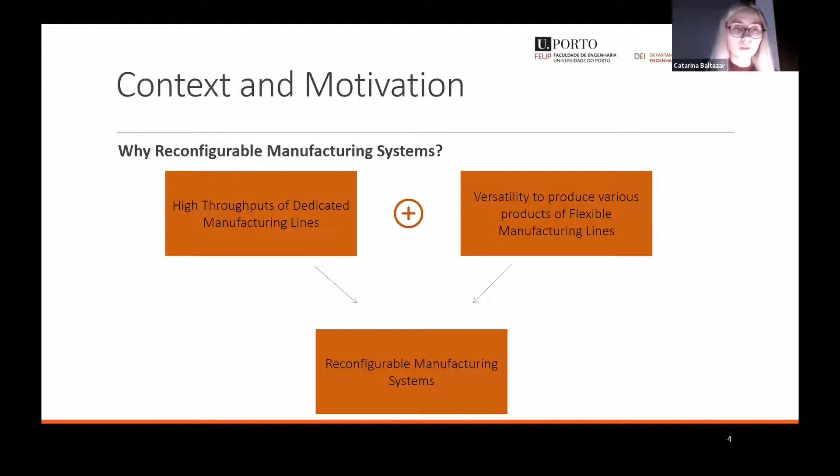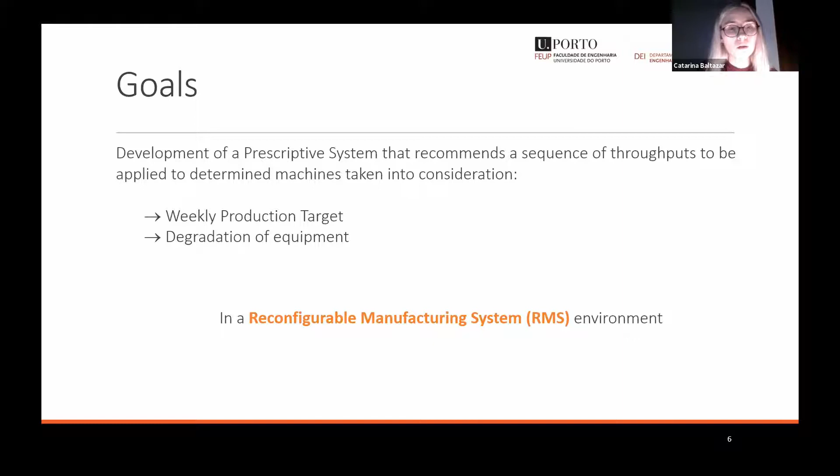So our main goal is to develop a prescriptive system that recommends sequences of throughputs that will compensate production losses due to maintenance actions, and also will take into consideration the weekly production targets and the degradation of equipment. And since we are in a reconfigurable manufacturing system, the compensation for production losses can be achieved not only by tuning the different throughputs, but also by routing pieces to healthy assets. So when we refer to degradation of equipment, we need to take into consideration that different throughputs will impact equipment differently. So if we increase the throughput, the degradation will be faster, and if we decrease, it will decrease the degradation of equipment.

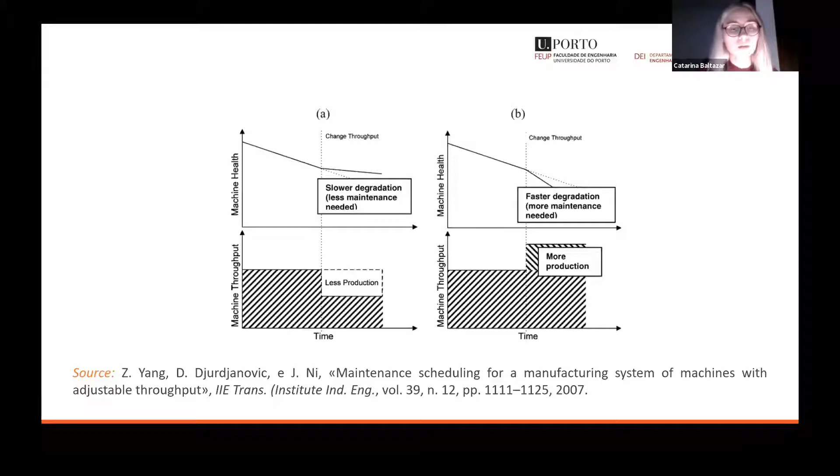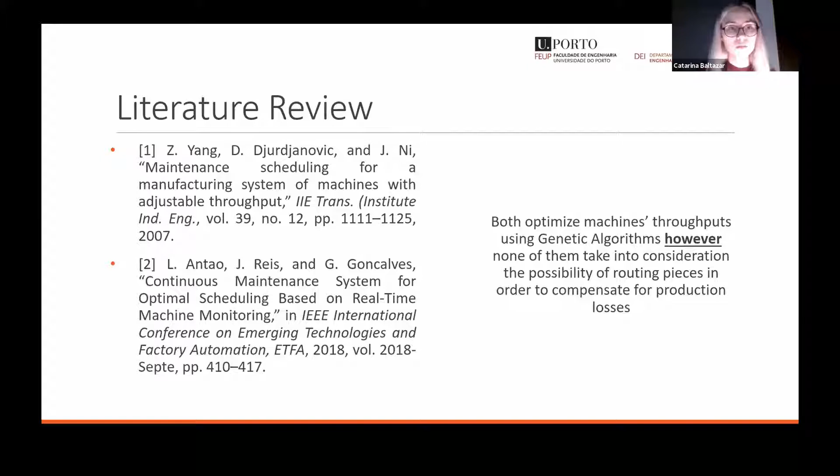So prescriptive systems can be understood as systems that recommend one or more courses of action, and there are prescriptive systems to help in the order of spare parts, scheduling, and life cycle optimization. And regarding their implementation, evolutionary and swarm algorithms are the most common ones. So before going into our implementation, regarding the papers already published, I would like to highlight two where both optimize machine throughput using genetic algorithms, which will also be our approach. However, none of them take into consideration the possibility of routing pieces in order to compensate for production losses.

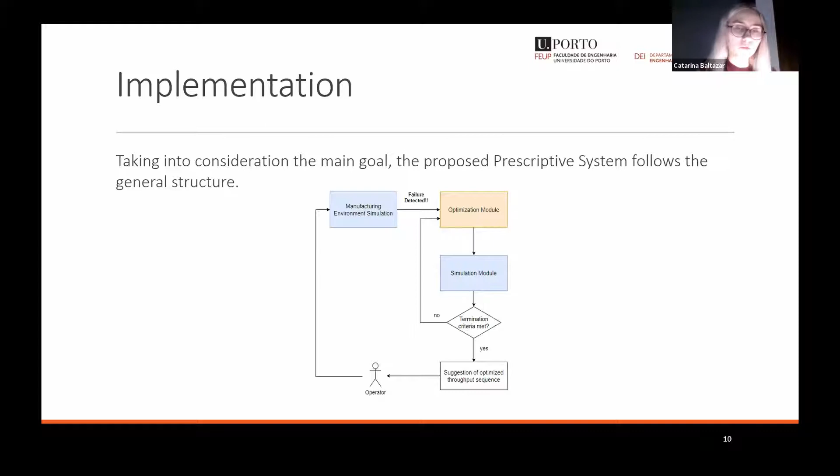So, taking into consideration our goal, we decided to implement a simulation-based optimization module. And this simulation will allow us to evaluate the solutions, what-if scenarios, and also simulate failure predictions. And our general approach is that the manufacturing system is running in the manufacturing environment simulation, and once a failure is detected, the optimization module is triggered, and the generated solutions are evaluated through the simulation module, which is an image of the first block. And the optimization loop will occur until the termination criteria is met. And when it stops, the suggestions are presented to the operator. And now that I've given an overview of the solution proposed, I will discuss each module individually by starting with the simulation one.

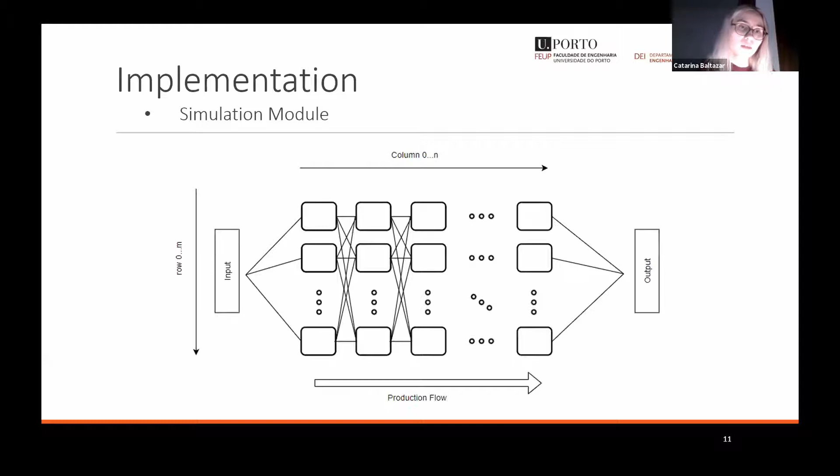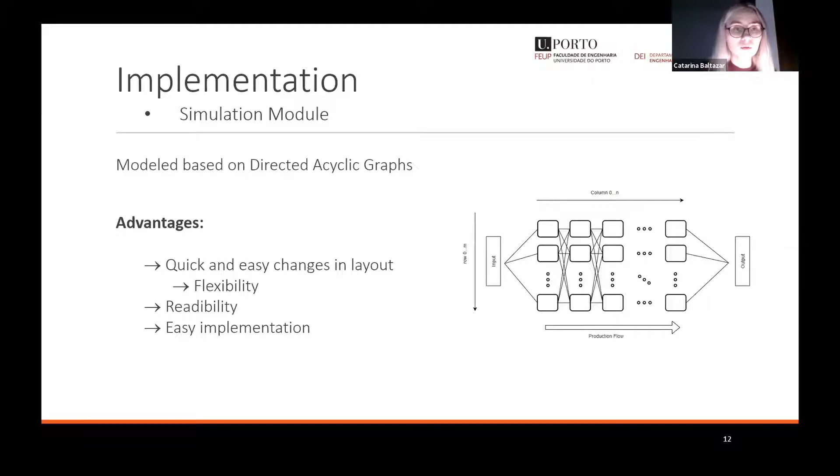In our paper, we simulated the systems as the ones in the figure, where a piece processed in any machine of the column, for example, 1 can go to any machine in the column 2. And this means that all machines in each column have the same available type of operations. And the pieces are processed sequentially. So they enter as input and get out as output. And to model these kind of systems, we used graphs as they allow quick and easy changes in layout, offer good readability, and are easy to implement.

Since we used graphs, a node corresponds to a machine and the edges are the connections between the machines, and these edges are weighted. The lesser the weight, the higher the priority, and this is how the machine knows where to send the piece. Also, each node has associated an object of the class machine, which saves several information regarding the equipment, and those informations can be divided into 3 types of parameters.

The identifying parameters such as age and machine ID, however, not limited to these 2. Operation parameters, which is the types of operations available and the current throughput, and reliability related parameters such as mean time to repair and mean time between failures.

These last type of parameters are very important because since we did not propose a predictive module, we need to somehow simulate the failures in order to validate our system.

So we consider that the probabilities of failure are known and failure detection is done based on time intervals. So the mean time between failure associated with each machine decreases each tick of the simulation, and once it falls below a certain threshold, a failure is detected.

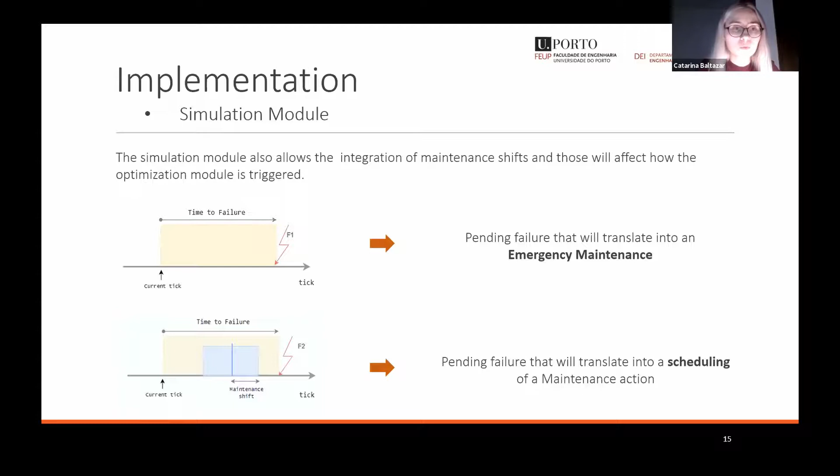And now that I went through all the main points of simulation, I'll start explaining the optimization one, which is the key to the prescriptive system, as it is what allows for the compensation in production losses. So the simulation module just exists in order to support the optimization one.

And as I said initially, we chose to use genetic algorithms. And each solution is an individual, which is a chromosome, and each gene will represent the throughput of a certain machine at a certain day.

So if you want the throughput of machine 1 at day 1, it is the first position.

Here we have the fitness function, where the first term is the difference between the production weekly targets and the number of pieces produced. In essence, it evaluates how far the system production is from the targets, and the square ensures the non-negativity of the values.

The next 3 terms are all related to maintenance actions. The first one is the scheduled maintenance, the second, the emergency maintenance that I already explained previously, and the next one is regarding new maintenances in the following 3 days of the following week.

So in order to prevent that we cause new failures due to the decisions that we are making in the current week. And also, since changing throughputs all the time is not practical, we introduced the last 2 terms in order for the algorithm to prioritize more homogeneous solutions.

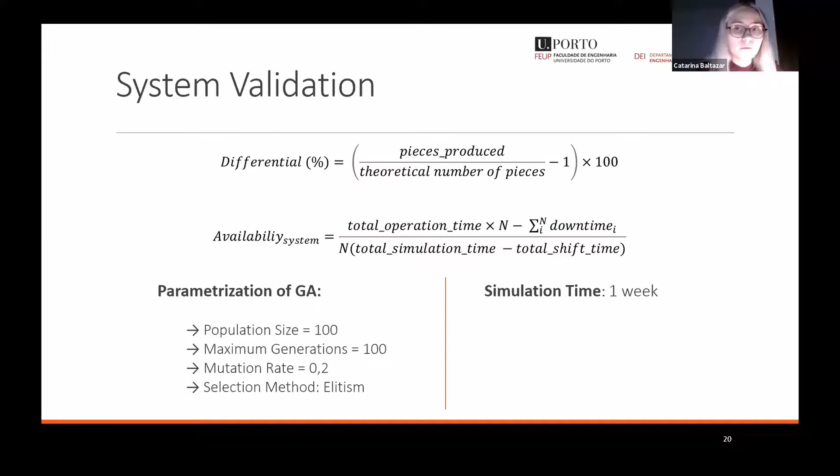We simulated during one week, considering five working days. We tested several scenarios and configurations, each configuration into two different scenarios: one where the target is the same as the normal capacity of the system, and another where the target is 20% higher, in order to understand if the system can comply if market demand increases. When we say a configuration 3x3, we mean 3 lines, 3 columns, so 9 machines in total.

Here are the results. Each test was executed 3 times to understand if it was just luck or not. The results are the averages of those 3 runs, plus the standard deviation of the differential. The first table refers to the results of the first scenario, where the target equals normal capacity, and the second where it's 20% higher. In all cases, the differential decreased, and in some cases availability slightly increased, marked in green.

This example shows how the availability increased. This is one specific run of test 4B, configuration 10x10, where we produced an excess of 5 pieces. If we notice, the maintenances regarding machines J5 and G7 disappeared from the current week, and the throughputs of those machines are generally lower than the baseline. So the algorithm decided to push these maintenances to the next week, and like this, the availability slightly increased.

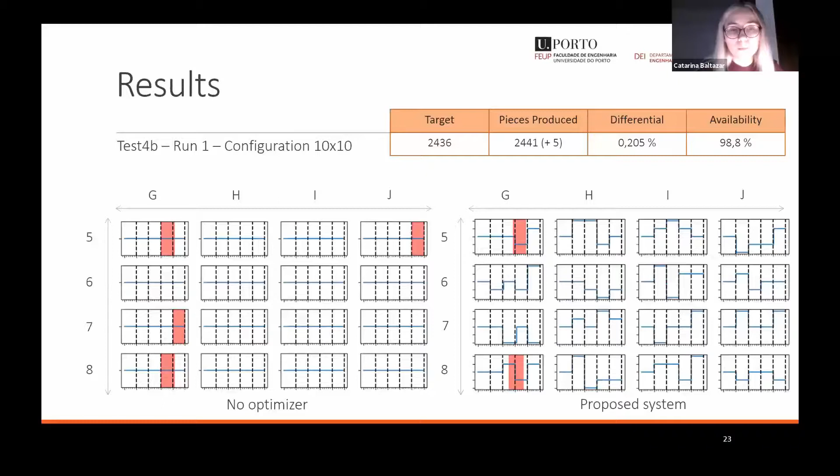To evaluate how the results vary from configuration to configuration, we plotted the averages of the differential. When comparing the averages, we want them to gravitate towards 0 with low deviations, and the solutions seem to follow this behavior. However, as you can see, there is a slight increase in the deviation from configuration 3 to configuration 4.

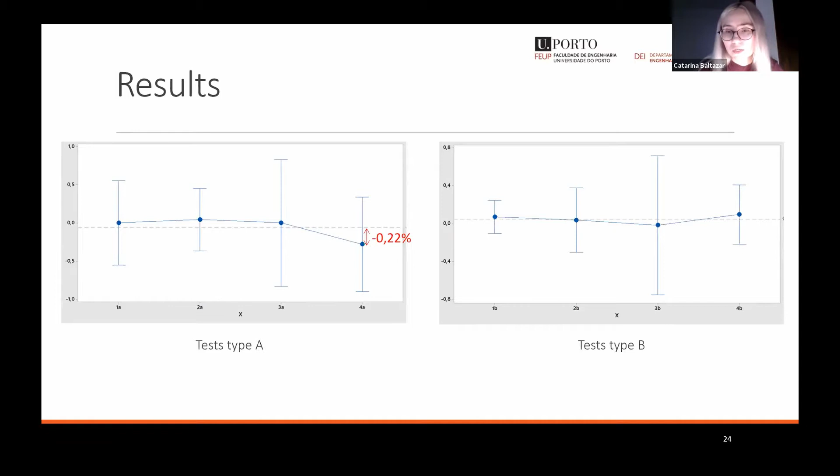However, this increase didn't surpass the margin we consider acceptable, which was 1%. So it doesn't seem enough to jeopardize the results regarding the tested configurations, and can be attributed to the search strategy and convergence of the genetic algorithm. However, we should do more tests, as we just did 3 tests per configuration, and that's one of the points I will discuss in future work.

So we presented a prescriptive system with an optimization module based on genetic algorithms, allied with a graph-based simulation module, and the tested solutions' results were consistent among all configurations.

Further research should be conducted to surely generalize results, and it's also very important to decrease processing times. Once we can decrease processing times, it will also be easier to do this generalization, if it is generalizable. However, the indicators show that it is.

Also, this prescriptive system was developed with a future integration of a predictive module in mind, and that would be one of the first steps after taking care of processing times, in order to offer a more complete framework. So thank you for your attention.

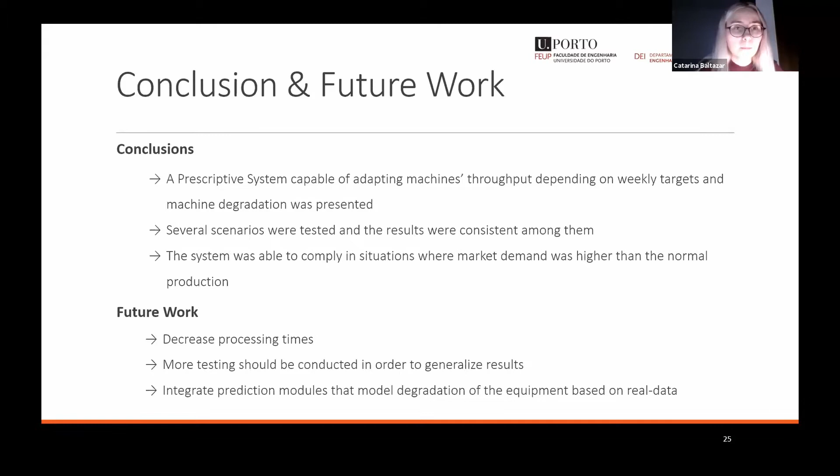Thank you very much for your presentation. Questions from the audience, please. Nobody? Then I would have one.

So how do you see your approach related to, when I read about Industry 4.0 and smart factories, it's very often about predictive maintenance with classic standard machine learning algorithms like learning, training, and predicting. How is this comparable with your approach? Do you think one can use each other, or is it contradictory, or what's the relation to that kind of approach? I think they can be allied, and that's the point when I say we want to integrate this optimization module with a predictive one.

There are several works that use machine learning and deep learning to predict failures, and then we use those predictions. In order to generate recommendations, we decided to use genetic algorithms, and now that we've validated our results, we plan to integrate with those approaches you were talking about. Okay, thank you. Thanks again. Thank you.